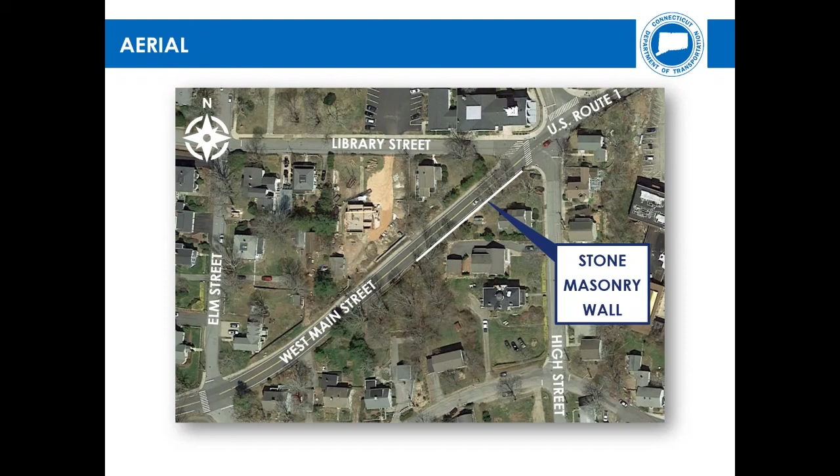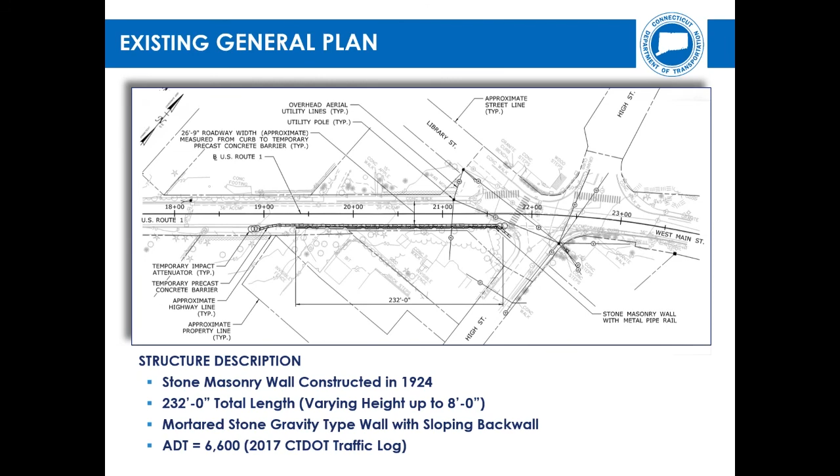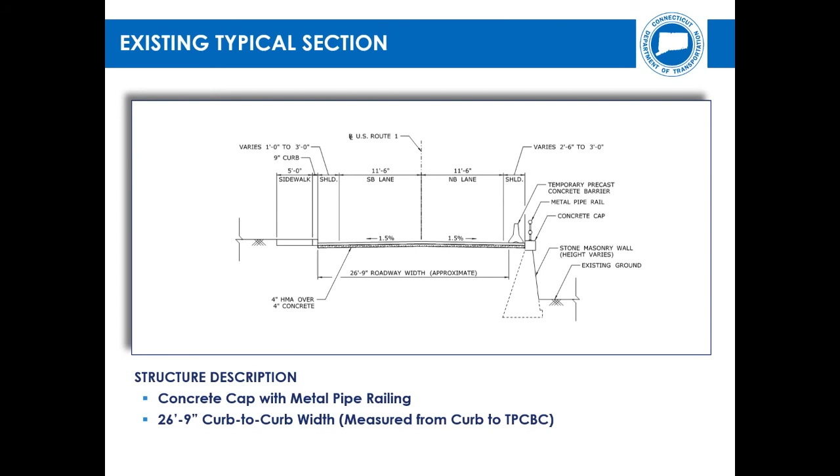I will now turn over the presentation to Greg Garish from BL Companies, who will explain the proposed project to rehabilitate the existing retaining wall.

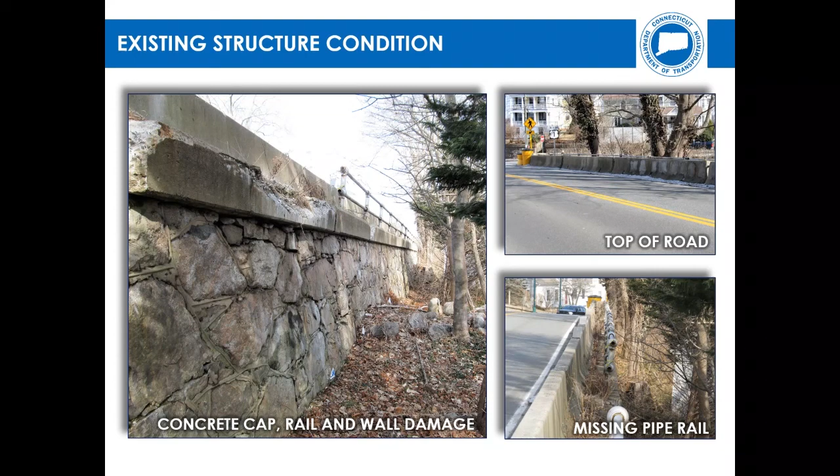Thanks, Lou. My name is Greg Garish. I'm a senior engineer with BL Companies, the consultant, liaison engineers, and project designer. The purpose and need for this project is the deteriorated traffic safety feature. The metal pipe rail has areas of section loss, broken pipes, and missing rail sections. The existing rail also does not comply with current safety criteria for traffic railing.

The existing stone masonry wall also has deterioration and is missing joint mortar over an estimated 25% of the wall surface.

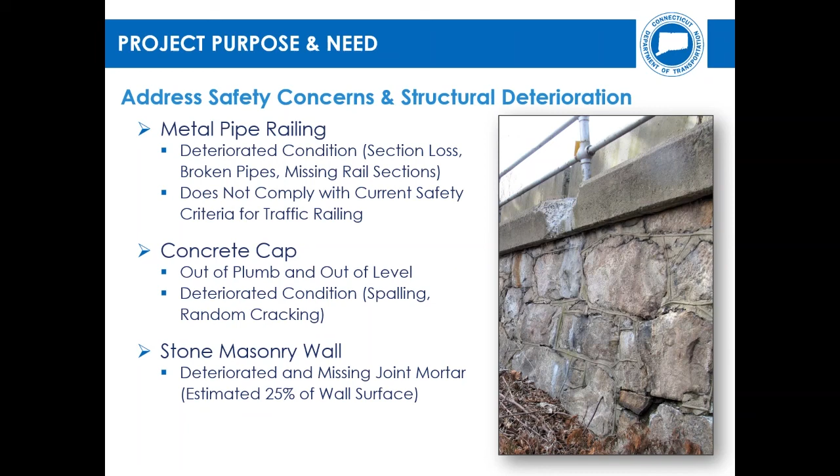The proposed wall rehabilitation consists of replacing the deteriorated existing metal pipe rail and concrete cap with a crash-rated open rail system anchored to a concrete moment slab. The open rail system will meet current MASH crash test rating requirements and will be 42 inches in height to meet additional safety standards for bicyclists traveling along US Route 1.

The concrete moment slab will rest on the existing wall and extend about 8 feet from the wall face towards the roadway centerline. Approximately 6 feet of the stone masonry wall will be removed at the northern end to accommodate a 44-foot long concrete return wall at the intersection with High Street.

The sidewalk will be replaced along the south side of the intersection of High Street and US Route 1, and the associated crosswalk will be slightly realigned. The northbound lane of US Route 1 will be reconstructed for the full depth of pavement adjacent to the stone masonry wall.

Construction will be limited to the northbound lane, terminating at the roadway centerline. Lane and shoulder widths will be returned to conditions predating the installation of the temporary concrete barrier curb. Aerial utilities exist in the vicinity of the project but are not anticipated to be affected by the proposed construction.

One construction easement will be required at 89 High Street to perform the pressure grout and repointing rehabilitation work on the face of the stone masonry wall.

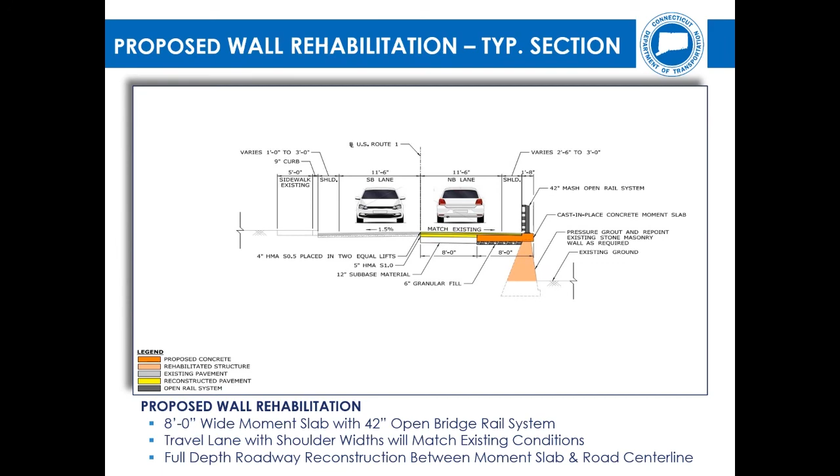During construction, the US Route 1 southbound traffic lane will remain open and continue to flow as normal. The northbound lane will be temporarily closed and detoured around the project site during construction. Advanced warning signs will be posted at the Elm Street and US Route 1 intersections. Temporary precast concrete barrier curb and temporary impact attenuator systems will protect traffic from the construction area.

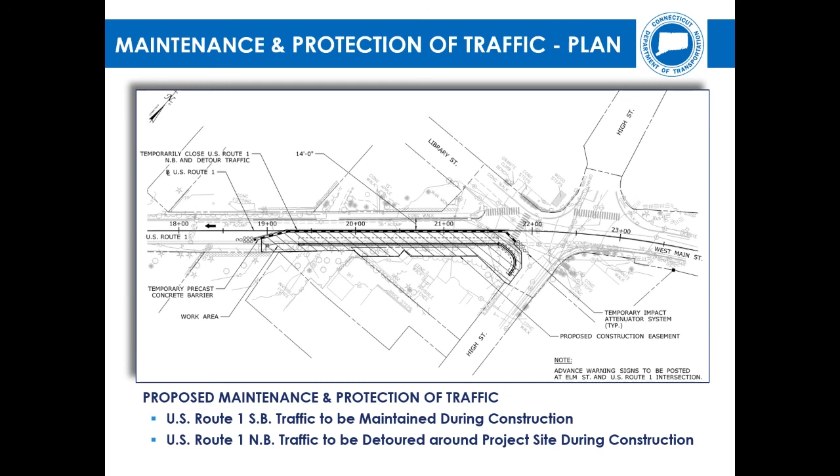The northbound lane of traffic will be detoured along State Highway 215, approximately 4.5 miles from the intersection of US Route 1 if traveling from the city of Groton, and approximately 7 miles if traveling the full loop from the project site. The construction detour is anticipated to last 3 to 4 weeks in total.

This project is not anticipated to impact any utilities nor require environmental permitting. As previously mentioned, there will be continued coordination with the Connecticut Department of Transportation Office of Environmental Planning and the State Historic Preservation Office to preserve the historical integrity of the stone masonry wall.

There are anticipated right-of-way impacts to perform repairs of the stone masonry wall, which entail one construction easement. I will pass it off to Matt Giannakopoulos to explain the rights-of-way acquisition process.

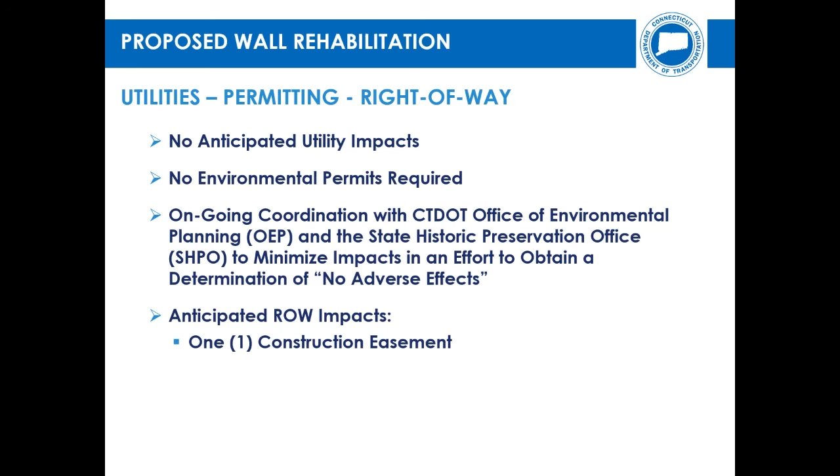My name is Matt Giannakopoulos, and I am a project coordinator with the Department's Division of Rights-of-Way. It is our office's responsibility to acquire the property rights needed for transportation projects.

The proposed project design requires the acquisition of property rights, so I'd like to give a brief overview of the Department's right-of-way acquisition process. Please keep in mind that the specific impacts are still being fine-tuned and may change as the design progresses. Any property rights that will be required will be acquired in accordance with Connecticut General Statutes, Sections 13A-73 and 13A-98E. Whenever there is federal money used in any aspect of a project, the Department must adhere to the Uniform Relocation Assistance and Real Property Acquisition Policies Act of 1970, as amended.

Once the design has moved to the point where we are ready to begin the acquisition process, each affected property owner will receive a formal letter of intent to acquire from our office, along with a property map which depicts the exact property rights to be acquired.

At that point, our office will determine the fair market value of those property rights and use that value to establish an offer of just compensation.

That offer will be sent out to the property owner in writing, and a right-of-way agent will be available to meet with the property owner and explain the project, go over the specific impacts to their property, and explain the state's offer. The property owner will have a reasonable time, typically at least 30 days, to consider the state's offer.

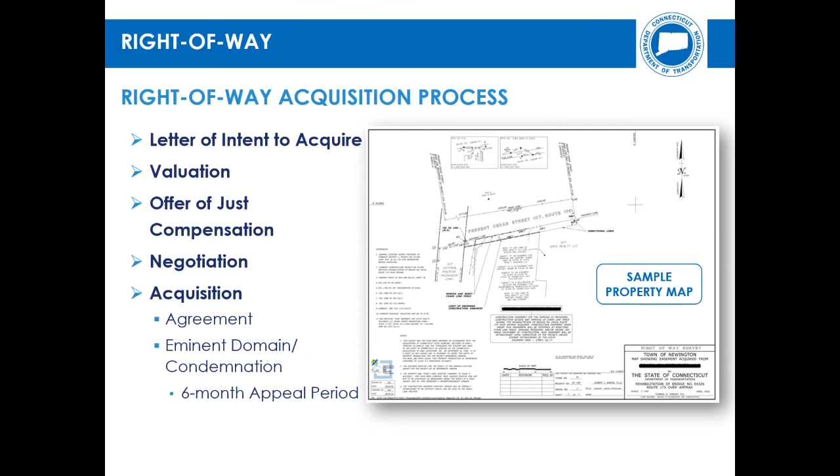I would just like to let everyone know we are currently a little less than 30% complete in the design process. Once design is complete, we are estimating construction to start in 2022, and it will be completed that same year. Of course, the schedule at this point is preliminary and is predicated upon the availability of funding.

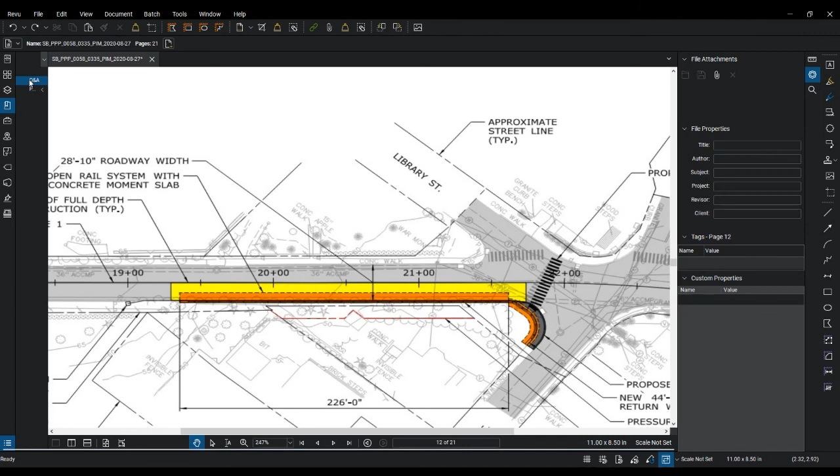All right, thank you, Jennifer.

Looks like we've got another question that came in on chat from Terry. The question is, why would the trees need to be removed in order to complete this project? And they don't think that that is totally necessary.

I can take that question, Greg, if you don't mind.

This is Louis Batcho again, and yes, the department is looking into all means of saving those trees. We realize it's a visual screening for the residents there that live behind the wall, and we're doing everything we can to save those trees.

We have determined that we're going to work around the trees for our construction. The work on the wall, behind the wall, is mostly repointing of the stones, and we can do that without affecting the trees. The only reason we would take a tree down at this point is if it's unhealthy and unsafe and could fall on the public during a storm event.

So right now we're looking at saving all the trees that we can. If a tree has issues with sightline distance, we may have to trim back some branches. But again, at this time, we're looking to save most of those trees. The only way we would take a tree down is if it would be determined to be unhealthy by our arborist.

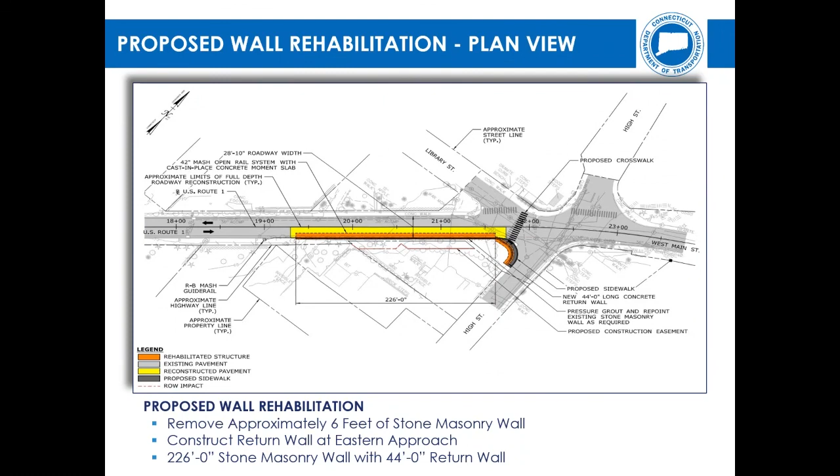Lou, perhaps I can share my screen over here. Sure, there you go. Yeah, there you go. Jennifer or Mike, please jump in. I was just going to say that a lot of that 44 feet is still on West Main Street, right? We're removing some of the existing wall. Yeah, that's correct, Lou. And I'm actually just going to share the plan view over here real quick. Let's see there.

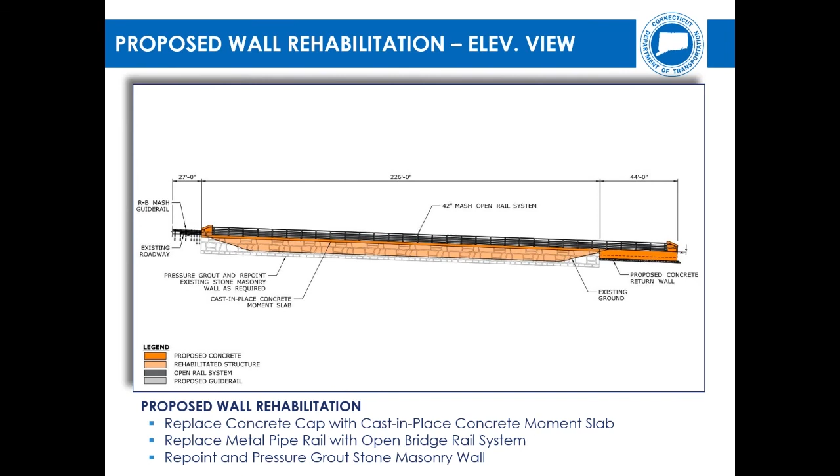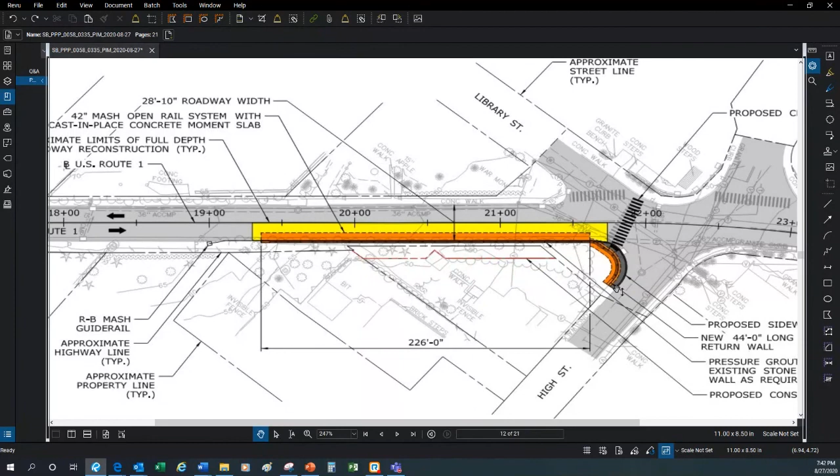Is everyone able to see that now with the plan view? Okay. So the return wall that everyone's kind of referring to and this resident is over in this area here. And so I understand it sounds like there's a concern because this is a tourist area and it sounds like parking is limited. I do want to just make note that this wall in this area here is all green and it's actually state property. It's part of the state right of way there.

So there really shouldn't be any parking in this area, first and foremost, because there's an existing sidewalk over here that is adjacent and abuts a crosswalk that allows pedestrians and others to safely cross this intersection. So this wall will actually just go, as we have it shown, behind the sidewalk on the green area. So it should not impact any parking. So I hope that helps clarify that question and concern.

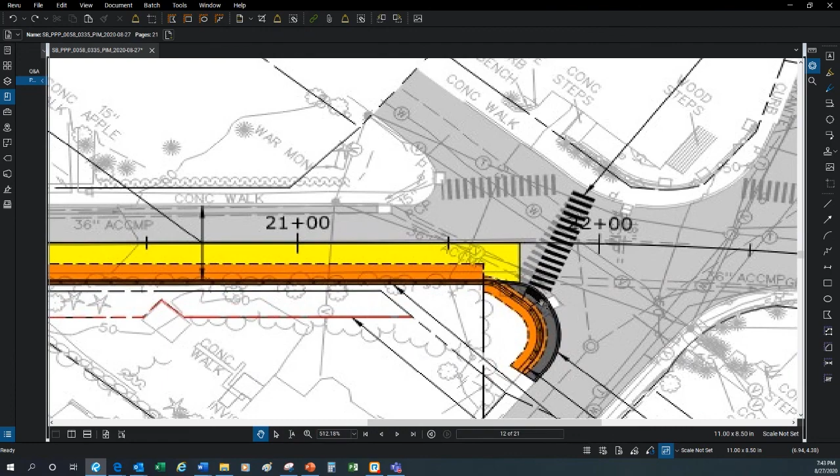Thanks, Jennifer. Greg, maybe I can share my screen and just try to expand what Jennifer had said as far as an actual Google Earth shot of this. Hopefully I'm not going to mess this up, but let me share a screen here, one second. Okay, so I just want to expand what Jennifer's saying. So, can people see my cursor moving?

Thanks, guys. I'll unshare my screen and go back to the splash screen. Thanks, Lou. That was pretty helpful.

Looks like we've got another anonymous question posted anonymously through the chat. What is a clear zone? Mike, you interested in? Yeah, and I apologize, Anonymous. I should have specified this when I answered the question pertaining to the return wall initially. So clear zone is a defined distance from, in this case, for southbound traffic, the center line or the middle of our road to the closest distance that a blunt object can be.

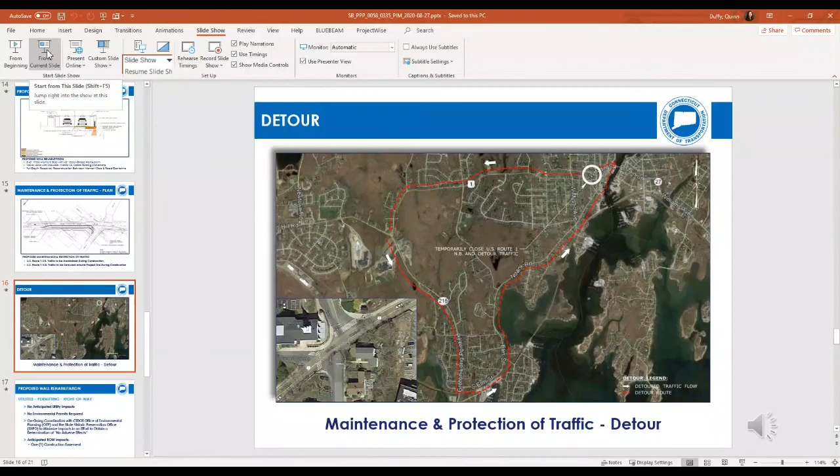So we got an anonymous chat message, and the question is, what streets will be used for redirecting traffic during construction? Jennifer, did you want to answer that? Certainly. Quinn, would you mind bringing up the slide that shows the detour route so I could speak to that perhaps? So this is actually a great question. So again, I just want to remind everyone that the total detour is looking to be in place really just for about 3 to 4 weeks, and it's only going to be detouring that small section of the northbound lane that I believe is about 250 feet, give or take.

So the slide that you see up on your screen right now does depict the detour route, which utilizes only state routes, mostly being U.S. Route 1 and then State Route 215. We do understand that there's local roads and ability for traffic to utilize whatever route they find appropriate, but we will be doing a signed detour that will be using only state routes to essentially take commercial traffic and truck traffic away from this area so that it has the least amount of impact. Thanks, Jennifer. Hope that answered your question.

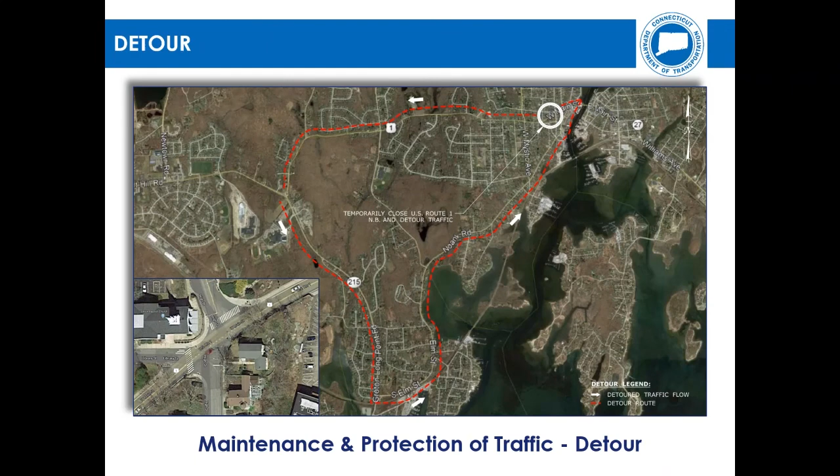We've got another question that's coming as well. All right, so this is another anonymous question through the chat. The statement is that the fact that it will taper is better than what I've envisioned. I did not realize it would taper down. I think we're talking about the clear zone. I would like to know when this clear zone law came into being, because the railing was there for decades without any return wall.

So Greg, yeah, I could take a stab at answering this question. So the clear zone isn't a law, but it is a safety standard, and obviously safety standards are improving every day and are changing, and so we're just trying to keep up with the current standards. So therefore we are looking at what has been set most recently. So I can't say exactly when that changed. I'd have to go back and look, but I will just note that they are constantly changing and improving at all times. And so when we do build something and go to construction, we want to make sure that we are utilizing the most up-to-date standards and safety requirements, which currently is what we have shown there.